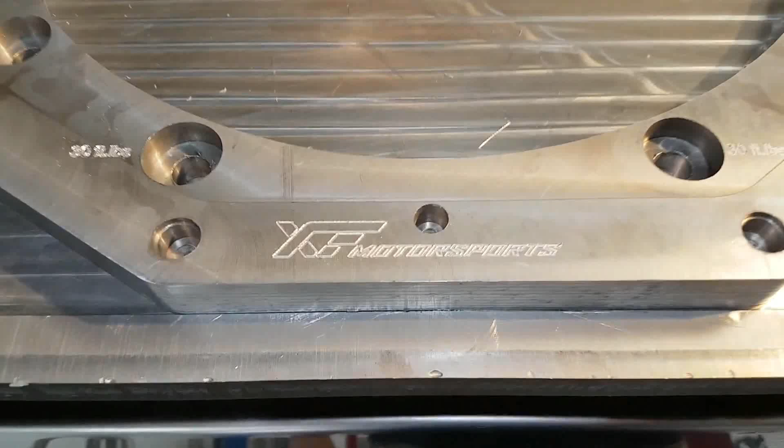It's finally time to start work on the E55 that we're going to be manual swapping. We're going to be putting a transmission from a 350Z in this car. It is going to be a bit of a long process, so we're going to do it in a few parts. For this first part, we're going to be making the billet aluminum adapter that is going to enable us to bolt this 350Z transmission to a Mercedes engine. And Karen's going to explain how we're actually going to make it.

So we're going to be using the bolt pattern from the Mercedes engine and using the CNC machine to create matching adapters for the transmission and the engine to put them together.

Yep, and once we have the adapter made in this video, then in the next video we're actually going to be taking the automatic transmission out of this car, bolting the 350Z transmission in there, and after that we're going to have to figure out the transmission mount at the back, the drive shaft, and also the shifter location. That's probably going to be in part 2, and then from that point on it's just going to be about working on the electronics and getting the whole thing working. So I'm pretty excited about this one. Let's start work by making the adapters, and then after that get into all the rest of it.

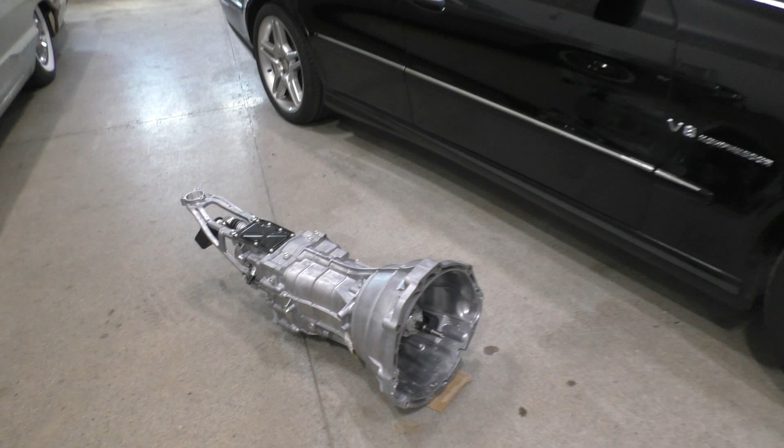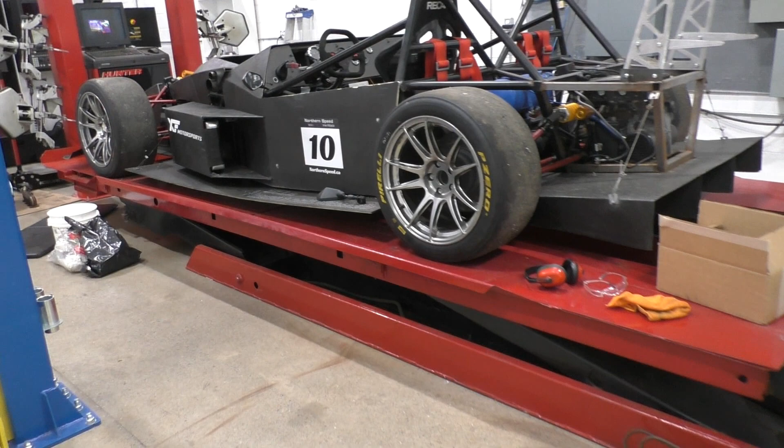So just to quickly show you guys the car and the transmission before getting into everything else. This is the transmission from the 350Z, and the reason I chose the 350Z transmission over any other transmission for this manual swap is because this is an amazing transmission. First of all, the gear ratios work perfectly with the E55 engine, and the diff ratio and everything is something that I've already tried in that car. I chose the 350Z transmission for that one. In fact, you can see the transmission right there, and it's a swap that worked absolutely amazing. Perfectly reliable, no problems at all handling the power.

And the other amazing thing about these transmissions is that new transmissions like this one are still available from Nissan that you can buy for fairly cheap. And of course the aftermarket options are just insane. You can get sequential transmissions in the same bolt pattern that literally bolt on. Clutch options everywhere from multi-disc clutches to single disc racing clutches. So basically once this kit is developed, anyone is going to be able to buy it and literally bolt this transmission into the car with the minimum amount of fabrication required. There's going to be no cutting the bell housing or modifying the engine in any way, so that everything can be bolted on.

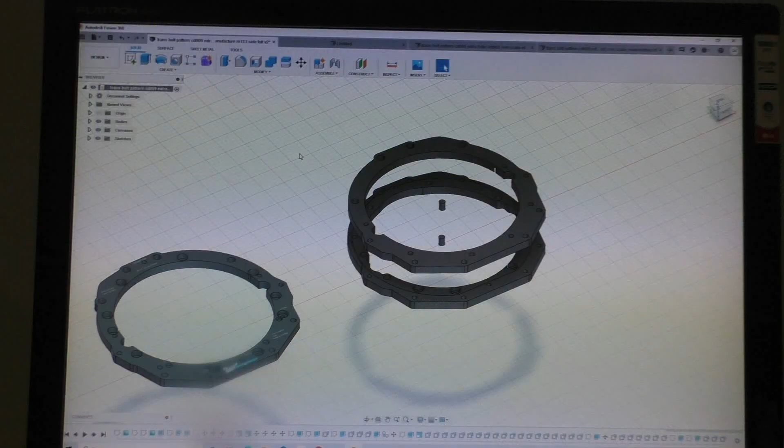So starting off by quickly showing you guys the design that I have come up with to make these engine and transmission bolt together. So this is the design. I've had to design two separate adapters. One is going to bolt to the engine, one is going to bolt to the transmission, and then they both will get bolted together. It's a fairly complex design just because the 350Z transmission and the Mercedes engine have really similar bell housing sizes, and there's quite a few bolts that overlap.

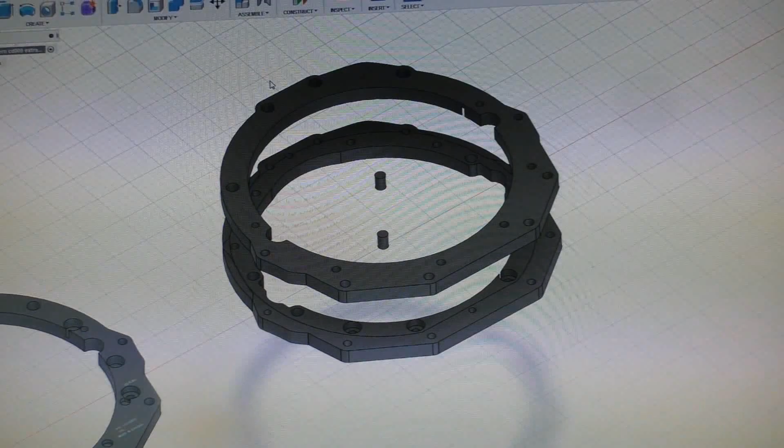For the design I initially went through quite a few different designs and simulated what would work and what wouldn't work. This was one of the earlier failed designs, and you can see that this one had quite a few weak points. But this was the final design that I came up with, and this one is definitely going to work because all the forces look pretty good. It's a pretty efficient design actually, and the weight of both the top part and the lower part of the adapter is going to be 4 kilograms, which is half the weight of the adapter that I previously made for my car. That was 8 kilograms. So fairly strong, really lightweight.

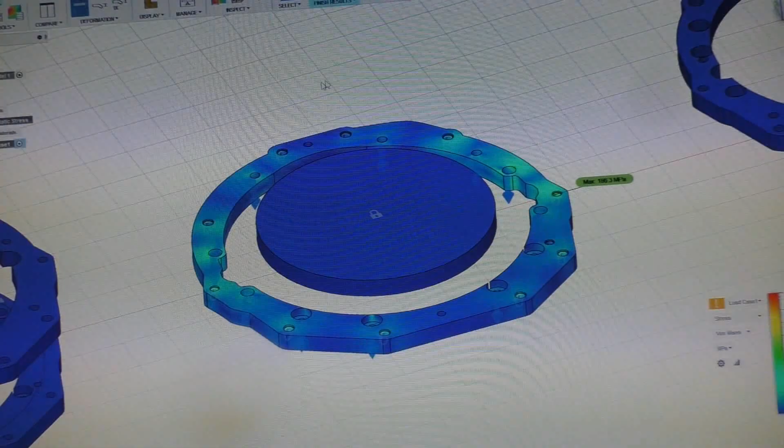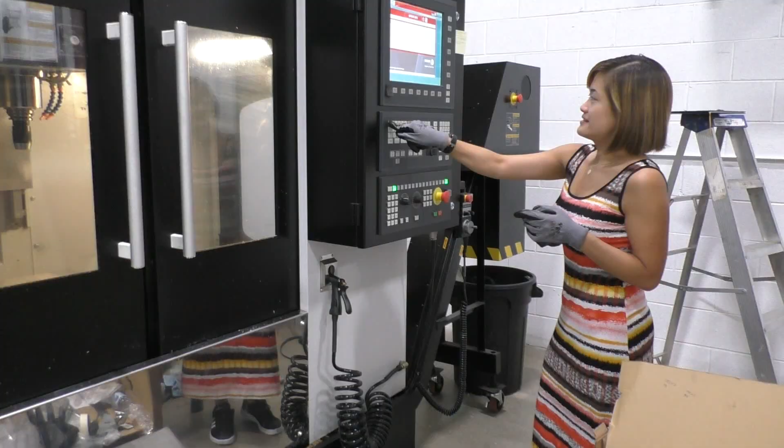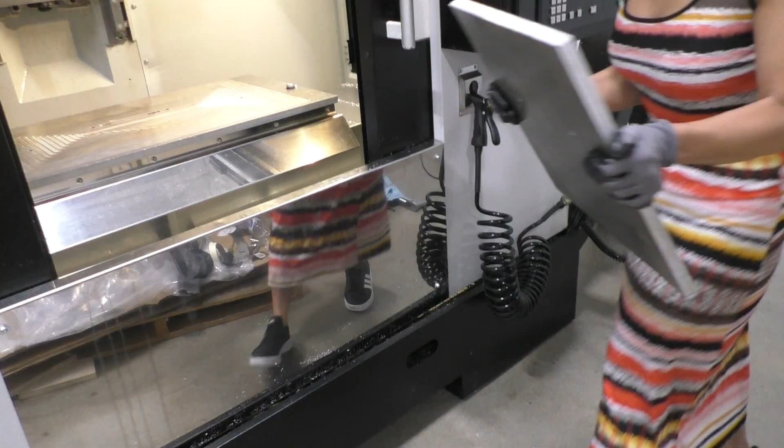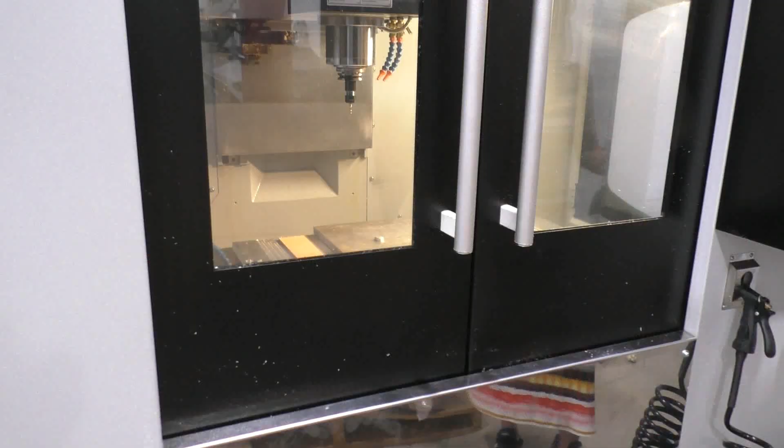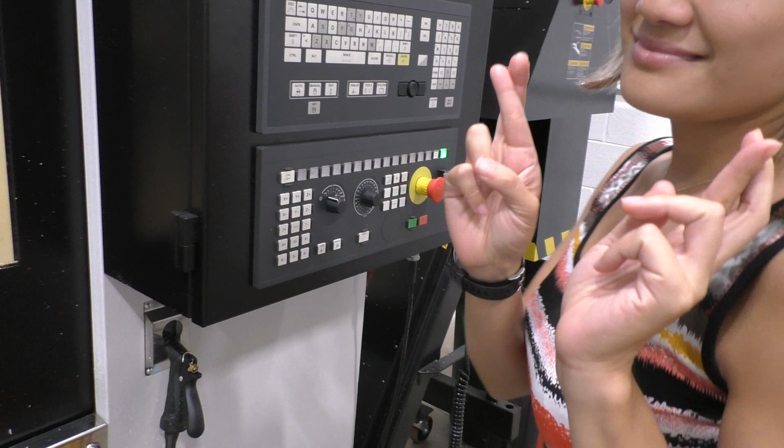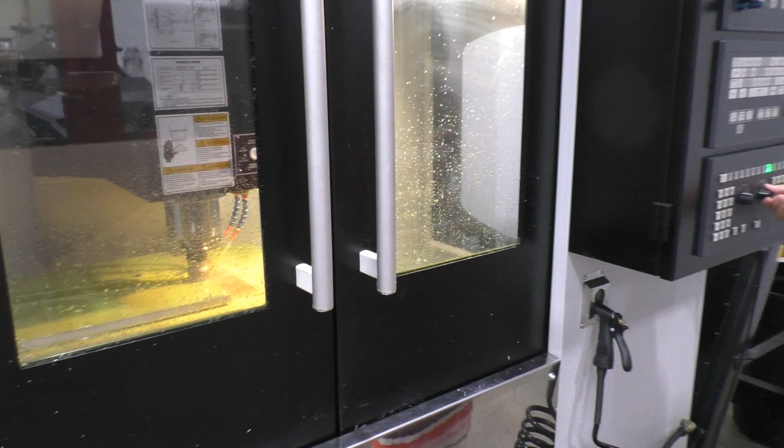So now all our tools are set. The zero is set, the tool is clamped in place, and everything should be good if we have done our job correctly. So now is the nervous moment of actually pressing the green button on the machine and letting it take over and hope that everything goes okay. Let's press the green button. Okay, we're on the wrong tool, so it's going to change the tool first. We keep the feed rate really slow so that if we have screwed up on something, we can stop the machine in time. Perfect.

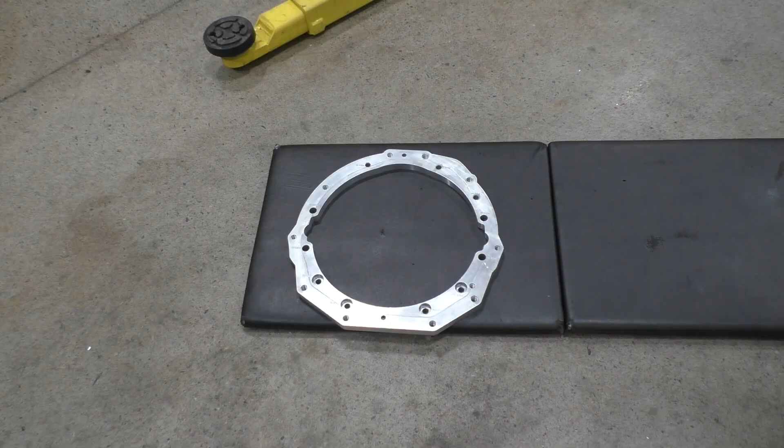Here's a final look at one side of the adapter after it is all complete. This is the side that is going to go on the Mercedes engine. I've actually engraved everything on it, so it's going to be easier to install whenever someone is installing it. Also, all the torque specs are engraved on there for all the bolts that are going to bolt through this adapter to the engine, just so that there's not going to be any looking around for torque specs when you actually have to install it.

So next it was on to milling the 350Z side of the adapter. So pretty much a similar process in terms of all the tools and how we made it.

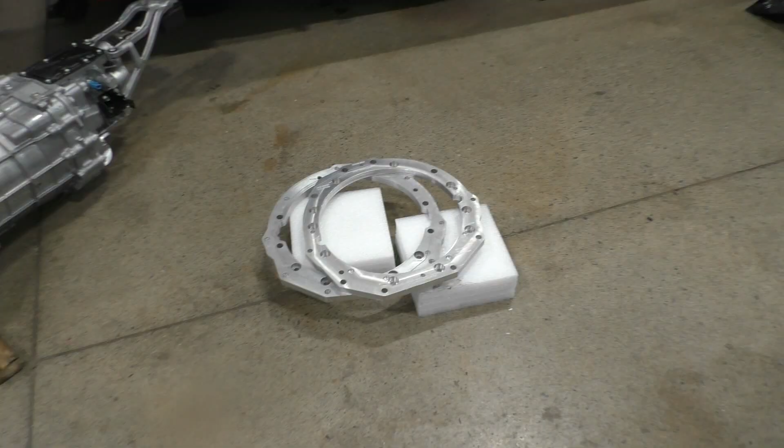Here's a final look at the adapters after they are all milled, and they're looking pretty good. So this is the transmission side. I've engraved everything on it, so it says CD009 side. This is the part that goes on the transmission. That's the part that goes on the engine. And I'm going to be bolting this transmission and the broken engine together really soon.

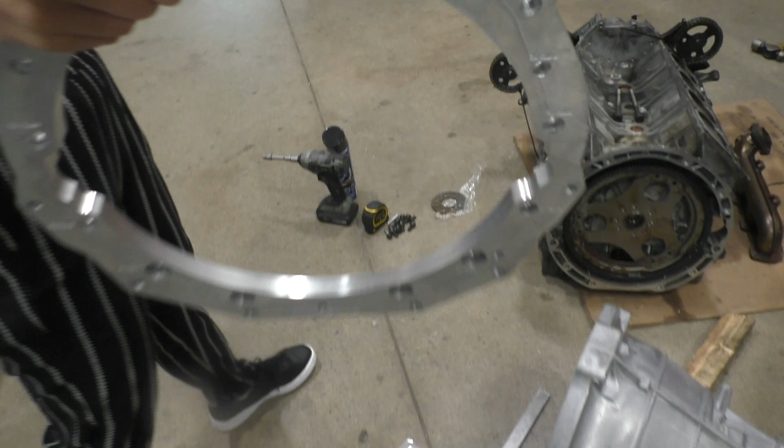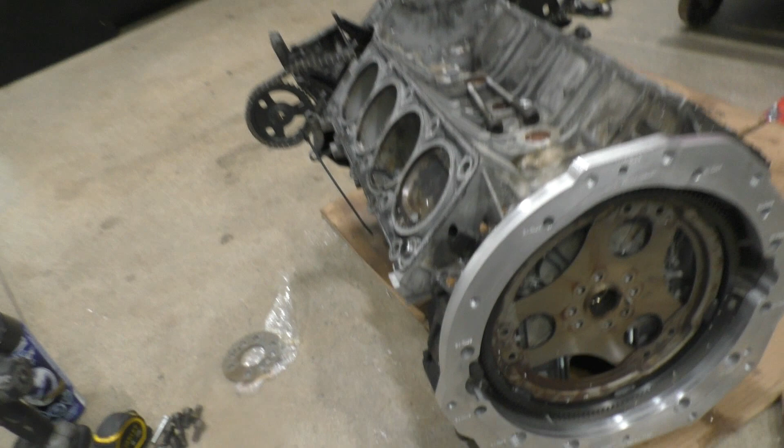After the middle part, the flywheel adapter is also done, but for now I can just put this one adapter on the engine and show you guys how everything lines up. Or well, Karen is going to do that for me because it's gonna make my job easier. There you go. So yeah, it just lines up on the alignment dowels on the engine. Everything lines up perfectly actually, and all the bolting points, you can see they line up. Yeah, that's all looking really good.

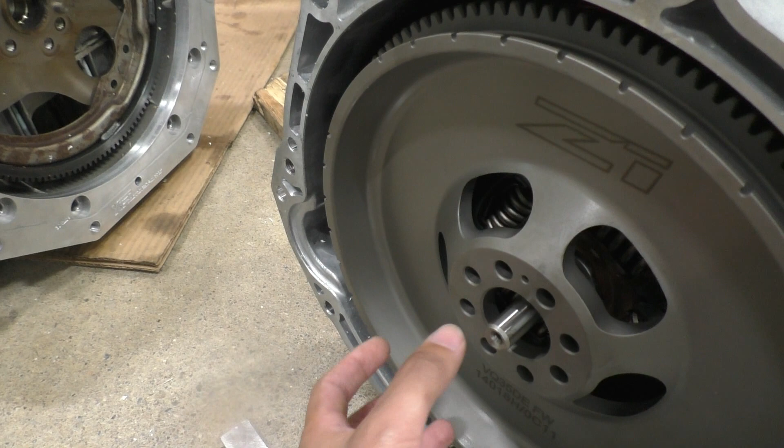The part that is left now is what I was actually measuring right now. It's to get this flywheel bolted on the Mercedes engine. So to get this 350Z flywheel bolted onto the Mercedes engine, I really wanted to make an adapter that could bolt any 350Z clutch onto this engine, so that people have all different flywheel options and clutch options. So if someone wants to go with a multi-disc clutch, they don't have to stick with whatever flywheel comes with this kit.

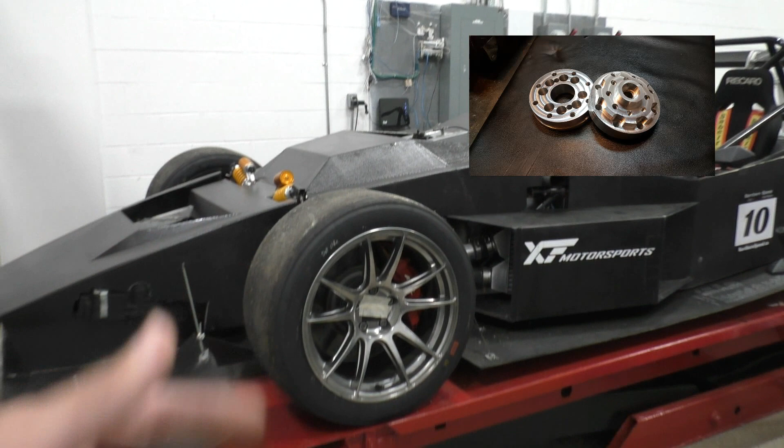So I decided to go with the same solution that I used in that car to make adapters that are going to bolt onto this engine, that are going to change the bolt pattern from this weird Mercedes bolt pattern to this simple 8-bolt Nissan bolt pattern, so that any clutch that fits onto the 350Z is going to literally bolt on to this car without any modifications or adding shims or any of that. So yeah, I was doing some measurements for that, working out where the clutch position turns out to be with these adapters, and the design has turned out really close to what I did in that car, so I copied my design a little bit, and that's the part that we're at right now.

So for making the flywheel adapters, we're using a round piece of aluminum, and Karen is setting everything up. She's finding the edge for this one, and then for this one, the zero position, we've used it as the center of the circle, just because there's no corners on a circle, so it would have been hard to do that. So we're going to find this edge, and then she's going to move over, find the other edge, and divide that by 2. That's going to be the center of the circle. And after that, it's just going to be onto the G-code and cutting this part.

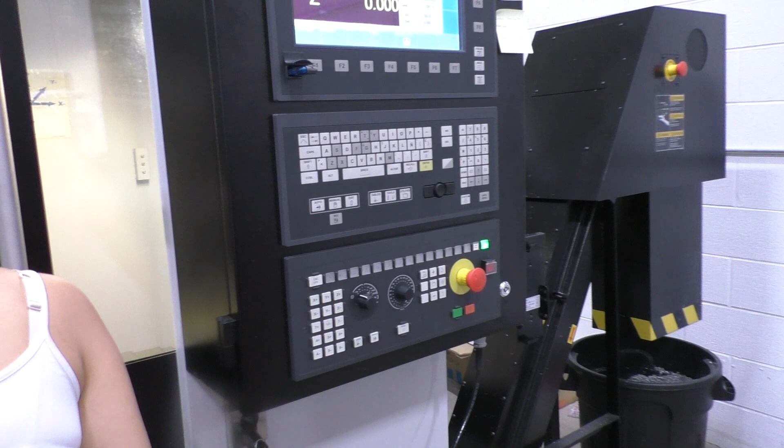For this adapter too, we've also had to make it in 2 different pieces because there's no way to match the bolt pattern in one piece. It would have been possible if these engines didn't actually come in 2 different bolt patterns. One had 8 bolts spaced evenly apart, and the other engines had this bolt pattern, which is 8 bolts but not spaced evenly apart, with this really weird bolt pattern. So when you try to match this bolt pattern with this one, there's quite a lot of bolts that overlap each other. That's why it's not possible to do with one adapter.

For this one, I believe the years after 06 are the ones that come with this funny bolt pattern. We are going to be making the adapter in this bolt pattern for now, but later on, I think for that 55, we might have to make another adapter that's the older bolt pattern, because this one is a 2005. I'm not sure what bolt pattern it has, and even asking the dealers using the VIN number, they don't know what bolt pattern it has, so it's just something that we'll have to find out when we take out the transmission.

Okay, so everything should be set for the flywheel adapter now. It's just time to hit the green button again and see if we get the right part again this time. Go for it, Karen.

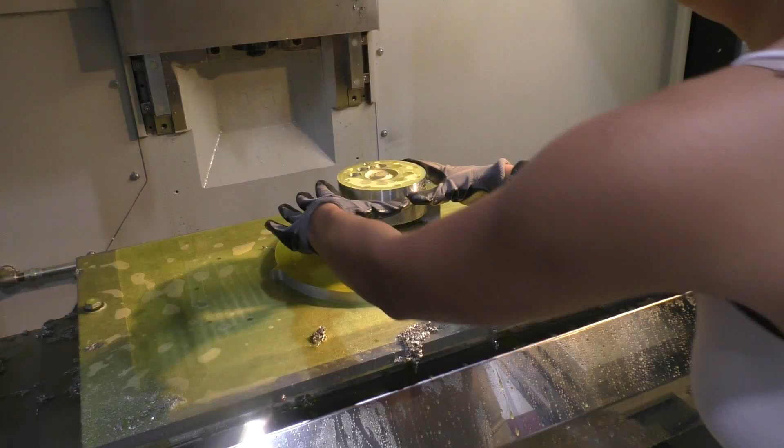Okay, so finally the part is done. Let's have a look at it and hope that it has gone proper. Yeah, that's the annoying part. Cool. Wow, that looks pretty cool.

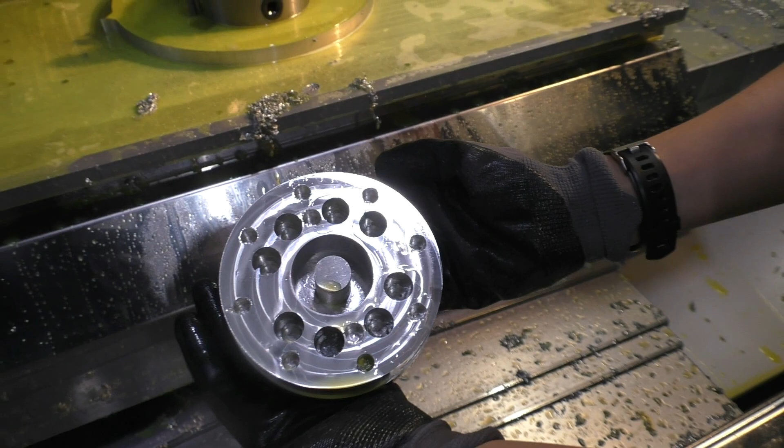Okay, now next we gotta flip it over, put it back in the machine, and we're only gonna do a facing operation on this side, take away all the stock, and then all the holes should become through holes, and then that should be our part.

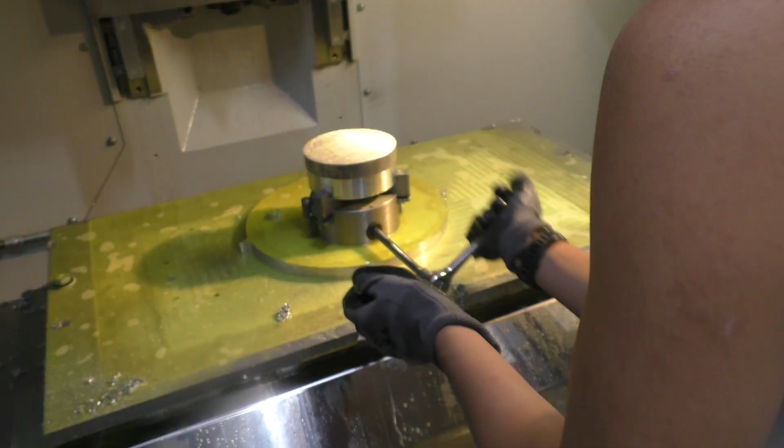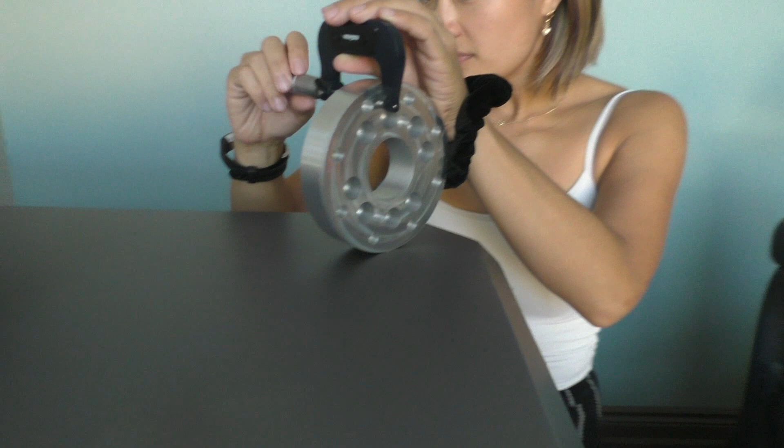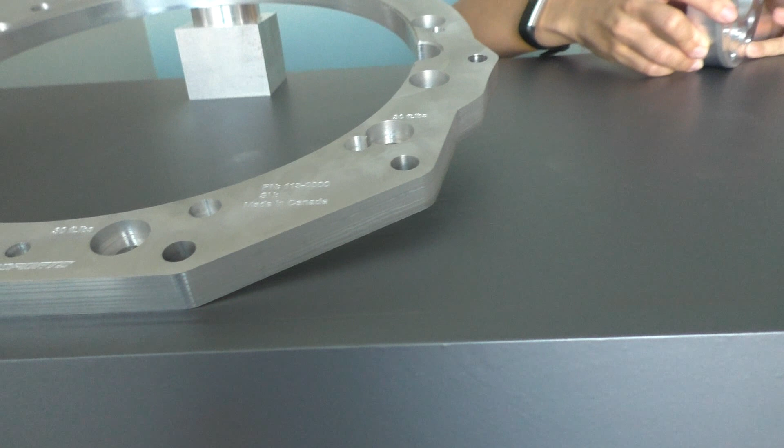So once the adapters are all done, the final part is taking all the measurements that Karen's going to do for every single adapter. We're going to measure the alignment dowels, whether they're thick enough, the thickness of each adapter, the runout on that thing, the thickness of that thing, and yeah, just making sure that everything is within spec. And lastly then, Karen's going to put the serial number on each one.

And basically we have a test data sheet that we fill in when we take all these measurements, and that data sheet is going to have the same serial number on it as the part is going to have, so that to make sure that every single part we're shipping out, we know that the specifications of the part are whatever they are. So it's just a way to make sure that the quality is going to be good for everything.

So the last step left was to make the other side of the flywheel adapter that the 350Z flywheel actually bolts on. And I would say this was the hardest part out of all of them because, first of all, these bolts had really long threads, so really deep holes needed to be drilled into it. And secondly, it had to be flipped over and machined from the other side as well. And of course, it needed to be perfectly concentric because if it's off center, then it's the rotating part, it would be completely useless.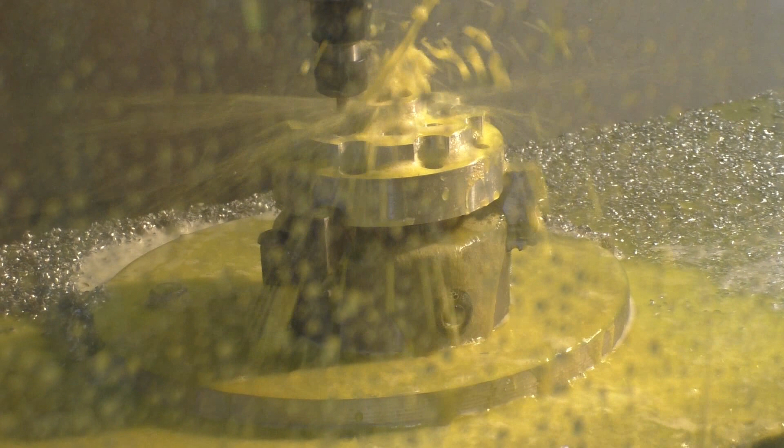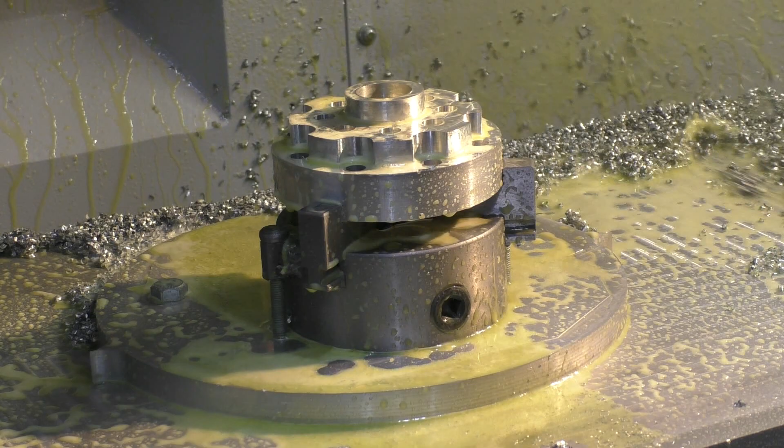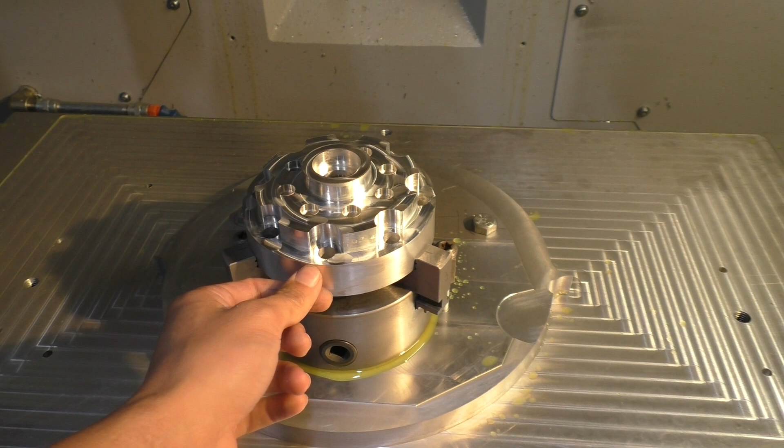Here's a look at the part after it is all machined, and it is looking super cool. The precision on these machines is amazing. Like this part, half of it was done from the underside, the other half of this thing was made from the top side, and you cannot even feel the slightest lip or something on it. It's just all smooth. There's no line or anything on it. That's amazing how good the precision is.

Last thing I want to check right away is that I want to put this pilot bearing in there and see if it's, oh yeah, it's a really tight fit. Yeah, I bet if I put it in there it's not even gonna come out again. I'm just gonna take it out. I wanted to check this because the zero and everything is already set, so if I wanted to open this a bit more I would have been able to, but I don't think I need to. This is a really good fit. Yeah, that's the amazing thing with these machines. Literally the first time you put the numbers in, everything just turns out exactly the same, so that's really good.

Next, there's only one operation left, that is rigid tapping, and the reason I made that a separate operation is because I really need to keep an eye on the machine when it's tapping these holes, because these are really deep holes, and if the tap gets stuck or if the tap breaks, then I immediately need to stop the machine.

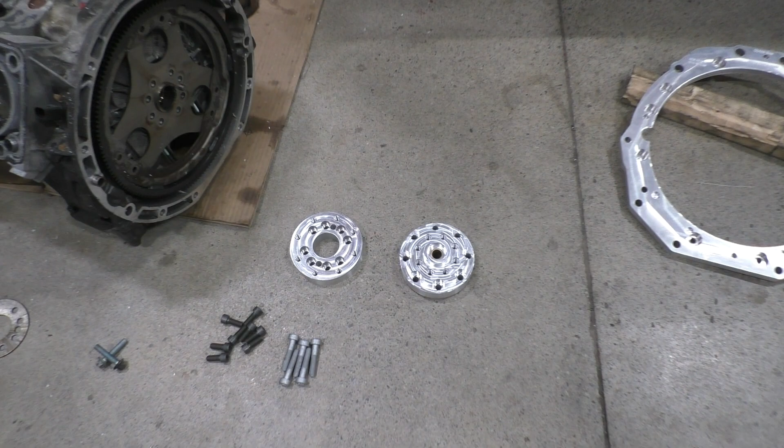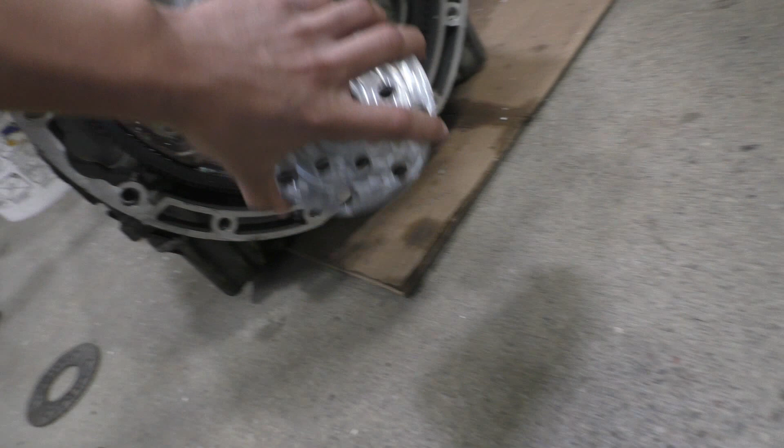So now both the flywheel adapters are done, and I'm super excited to put this together. So what I'm going to do is just test fit everything on this broken CLS engine just to make sure that everything actually fits. And just look at how good of a fit everything is. Everything just snaps into place. There's no extra play in anything, but it's not too tight either. So yeah, everything just fits on perfectly. It's amazing.

I can't wait to put this together and see how everything lines up. So yeah, let's do that right now, and then I'm going to be taking this off, and of course in the next video it's going to be onto this car, taking the transmission out of this and actually fitting this transmission in to the proper engine. So I'm super excited.

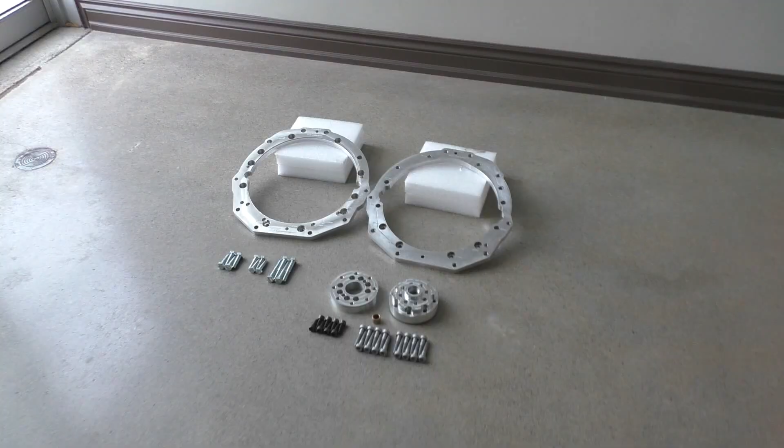The transmission input shaft, I believe, is nicely centered. Well, it should be nicely centered, because everything goes on alignment dowels. Everything is ridiculously precisely made. So yeah, it's looking extremely good so far. So here's a look at everything that is going to be coming with this transmission adapter kit. I've laid everything out at the front so that I can show you guys.

It's going to come with 2 transmission adapters. This, by the way, is going to fit any M113 engine, M112 engines, any Mercedes engine that came with the same bolt pattern, really. So the M156 even, it has a really similar bolt pattern to this. I'm not sure if it's going to be an exact bolt-on on that engine, but that's also something I'll let you guys know really soon, because there is a C63 coming in later for a manual swap. And if it turns out different, I will obviously also be making another kit for that as well.

So for the M113 side, the transmission bolts that come out from your car are also going to work with this one. I've sized everything accordingly, so you can reuse the same bolts. But for the 350Z side, I'm supplying all the bolts that you will need for the transmission. The sizes are a little different than stock, and it's just going to save you guys from looking around for hardware and stuff. So these are the flywheel adapters.

So this one is going to come in 2 different bolt patterns, because I believe the engines for 2006 had a different bolt pattern. I still need to make sure what exact year or time it was when they changed the bolt pattern, but that's something I will find out, to make sure that I don't send you guys the wrong parts. The flywheel bolts are going to be included in the kit because these are only one-time use. And these are both from a Porsche 911. These are also going to be included in the kit to bolt this adapter to the other one, and also for the 350Z flywheel to be bolted onto this adapter.

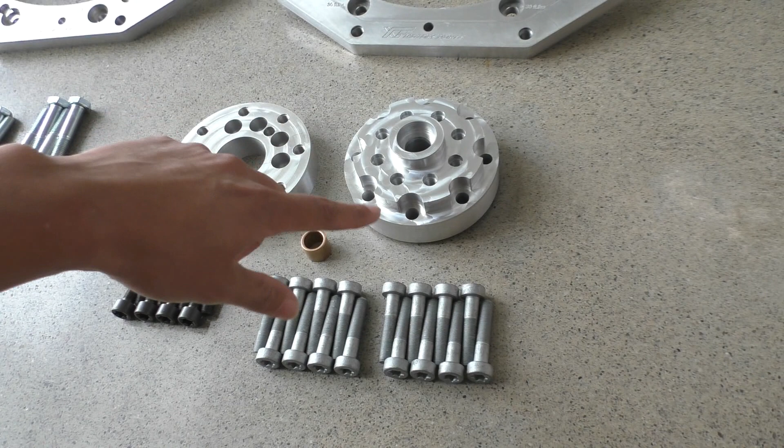This is a pilot bushing for the 350Z, and I'm also going to include this in the kit just so that you guys don't have to press these in yourself. I will actually press these in for you before supplying this kit, so it's just going to save you guys an extra step. Other than that, this kit is pretty much a simple bolt-on, no modifications required to the engine or transmission. Everything just literally bolts on.

I have not listed this kit on sale yet because there's still a few things that I need to do. I need to make fixtures so that I can put parts in the CNC machine, and everything is already zeroed, so it takes less time to cut these parts. And secondly, I need to source materials and find better sources for buying all these parts, because literally 70% of the cost of this transmission adapter comes from the materials, the hardware, the cutting tools and everything. So if I can drop that down, I can offer you guys a better price on these. So that's why I haven't listed these for sale yet.